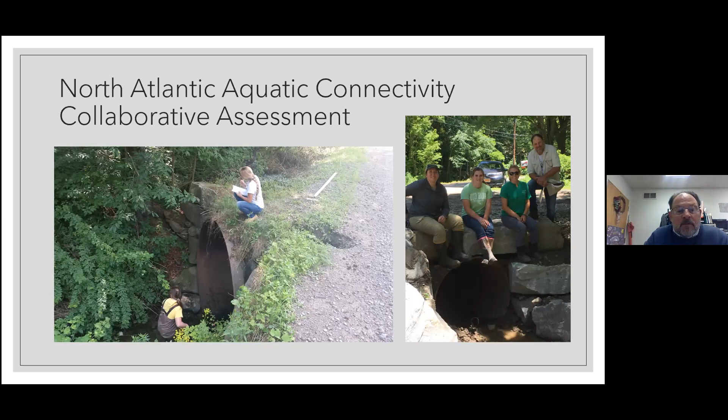So here we are doing the culvert assessments with myself, Chelsea White, Ainsley, who was a technician for me, who went to Cornell Cooperative Extension, and we had a TNC technician or a summer aide that was also assisting. So again, quite a few culverts were assessed throughout the watershed. Quite a few culverts weren't in too bad a shape either; we had more culverts that were allowing fish passage than were not. So we picked two sites for the grant that were the worst sites. This one is called Gardner Road.

Slide to the left showing the outlet of the culvert. You can see how the culvert is perched in the air, probably about a foot to almost a foot and a half, with a plunge hole at the outlet end right at the road shoulder. So this is why the fish passage was compromised on this culvert. And this culvert was only a 3-foot diameter size culvert.

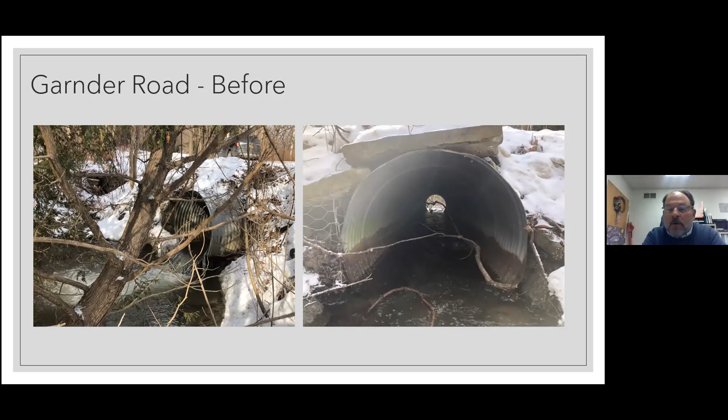And so we had to look at how to change the capacity of the culvert, along with trying to get the fish passage to work in this situation. What we decided to do was we did some measurements upstream, and these are the upper reaches of the Cohocton River and minor tributaries that flow to the Cohocton. They have been surveyed by DEC in the past, and some of them do have brook trout and brown trout in them.

So the biggest thing we had to do was get a stream permit, of course, because it's a Class C(TS) stream. And so we were trying to meet the dimensions that were needed for the new culvert requirements through the permit system of the 1.25 times the width of the bank full event, and then the embeddedness.

This project, we ended up being able to use a culvert which was an arched type culvert. A one-piece aluminized culvert was purchased because it was the most affordable and the easiest for municipalities and ourselves to install, rather than trying to do concrete box culverts and all that. This culvert pipe ended up being six foot in height and 9.5 feet wide at the bottom arch pipe.

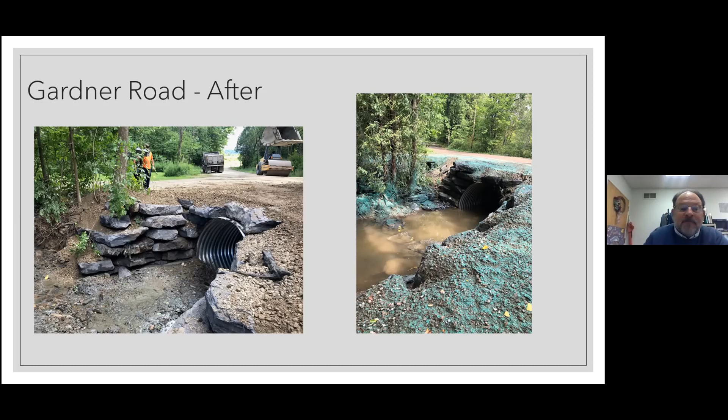This is the other project we did on Duesenbury Road. This culvert was actually a little bit bigger than the one on Gardner Road. It was a 3-foot squash pipe. Originally, we ran our calculations and bank full flow events, and we came up with the same size pipe that we did on Gardner Road. So we ended up putting in a 6 by 9.5 foot bottom width culvert in this one.

And Fisheries, or Pete Osterman, wanted us to try to maintain the pool at the outlet, because that's actually where most of the trout were holding up, especially this summer when the flows were so low. There's not a lot of pools or habitat along this small stream channel. So we ended up going in and actually netting the brook trout out of the outlet hole, and we took them upstream and put them in a temporary holding area while we did the project.

So my technician Chelsea and my operator Dave went fishing. I hope that was okay, if Pete Osterman's on, I don't get in trouble, but we put them upstream for the time we did the project, and then put them back in when we were all done.

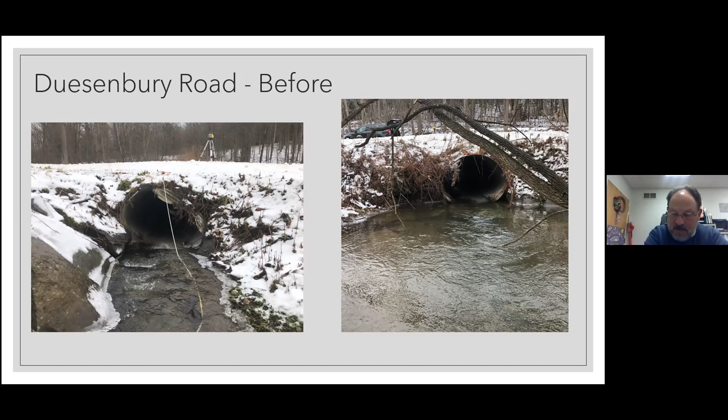Here we are tearing out the old culvert. It was a culvert that was 60 feet long. It was 3 20-foot sections. We ended up putting in a 65-foot culvert pipe to replace it. 2-piece culvert, so we had to actually band this one together.

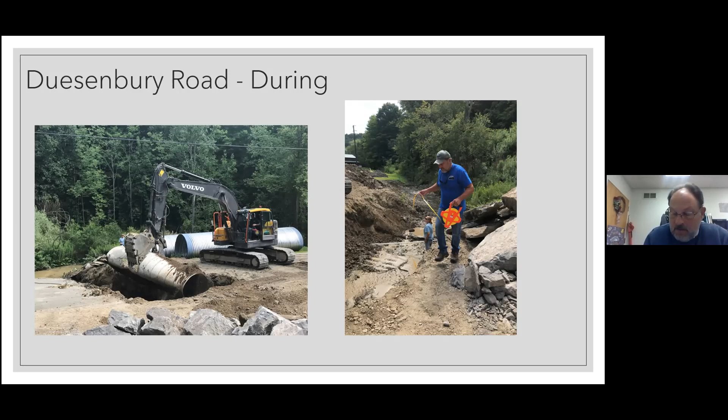Believe it or not, we were able to get that culvert dug out, installed, and backfilled so the road was open the same day. So we didn't lose any road. We didn't need to close the road for a lengthy period of time. These culverts get installed fairly quickly, and they work pretty well.

Here we are working on the inlet on the left-hand side. We're supposed to be embedding these culverts, so we tried to get a washed, cobbly gravel material, and we poured them in on the inlet end and pushed them in as far as we could.

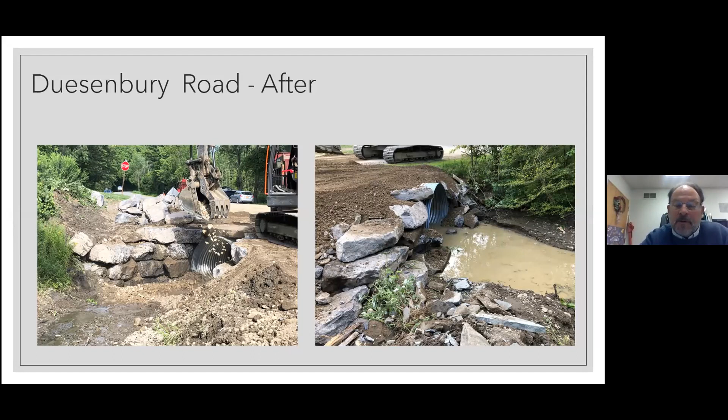And on the outlet end, the slide on the right is the outlet end before the weir or sill was built downstream to raise the water level up into the pipe. So we actually backed water up into this pipe almost to the inlet end by the time we were done with our downstream structure work. So those were the ones through that grant program.

And then I was contacted by Region 9 Fisheries in Allegany County to assist them with a fish passage project on 3 sites in Allegany County. These were all native brook trout habitat sites, and they were located in the Genesee River watershed on smaller tributaries in the upland area.

So this was what Region 9 DEC wanted to follow, the typical engineered rock riffle type construction to try to back water into existing culverts. We did not replace any culverts. These were all existing culverts, and we're basically trying to back water into them so that we had fish passage from the pool that was at the outlet of them.

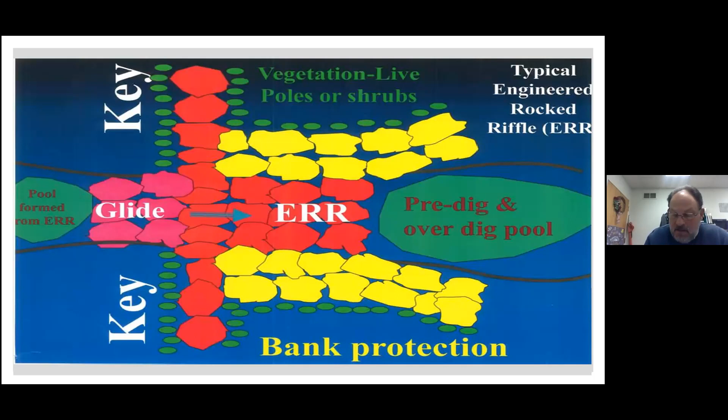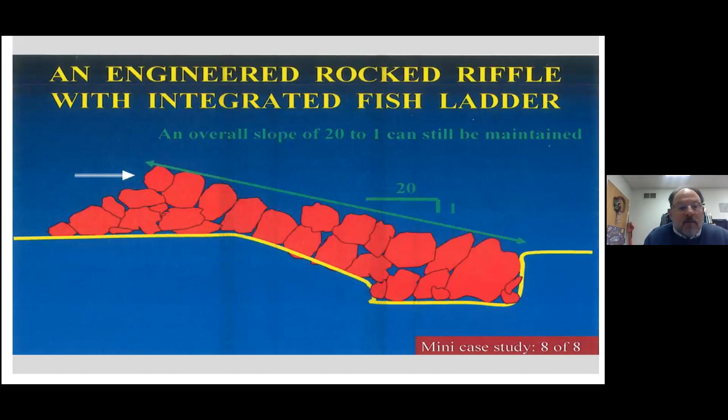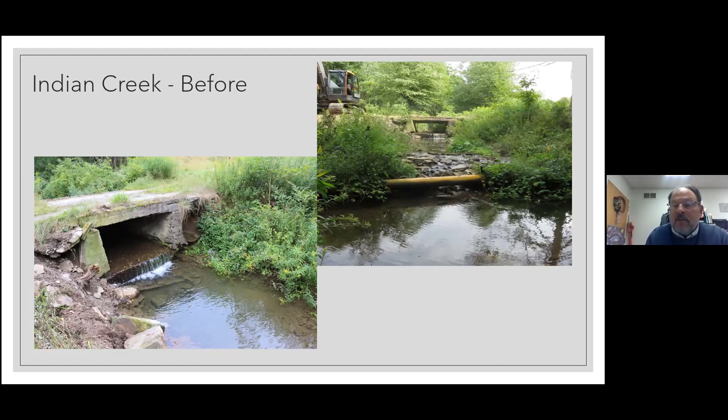Fortunately, this was the abandoned gas line. Although they had stuck a new gas line just upstream of it, 5 feet probably, which was only buried 17 inches underneath the bottom of the stream bed. So it was a little bit of a challenge trying to construct the rock riffle, because we actually had to bring the rock riffle down below this old exposed gas line so that we had a good keyway into it so we could hold all the material upstream, and so we didn't have any scour or erosion at the toe.

The reason why is we all discussed, we actually had two Fish and Wildlife people there working with us on this project. A fellow by the name of Thomas Hoffman, who works in the Great Lakes watershed with U.S. Fish and Wildlife, and a Betsy Trotter, who was actually not the administrator, but she's the one we worked with to get this grant approved. She actually had the funds, and the Soil and Water District in Steuben County actually applied for the grant money, and we're administering this grant.

But anyway, everybody agreed that because of the length of time it was going to take us to do this project, that we wouldn't go to all the work to try to dewater it and then put everything back when we were all done. And that's probably one of the reasons why we shocked the fish out of the hole before we started.

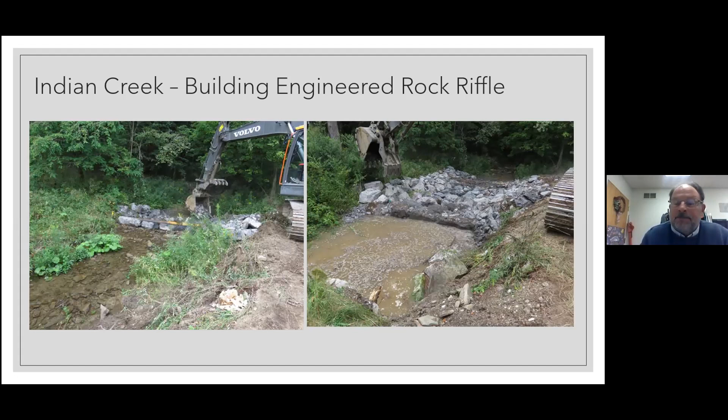And we were able to build enough pockets in between the outlet keyway and all the way up to the pool so that the fisheries and Fish and Wildlife were happy that the fish would be able to get up through all that once it filled up with the water. So there it is after the placement of the rock riffle, and the water's backed up into the box culvert almost a foot deep.

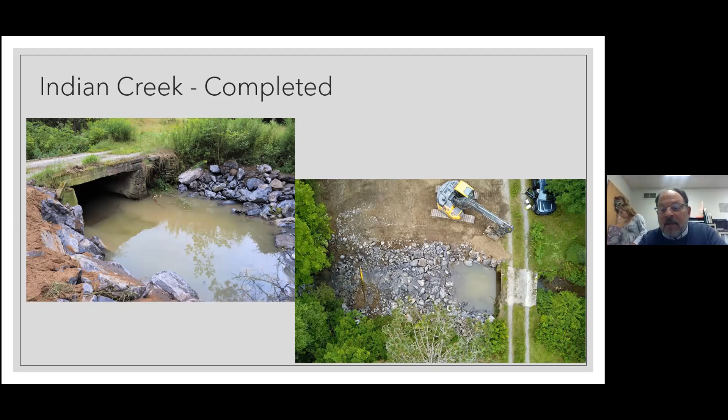The aerial view you see there is thanks to Melissa Yerrick with the Upper Susquehanna Coalition. She came the day that we installed all this and ran the drone around. So we got a drone shot of the actual project that was completed. You can see the private driveway bridge and the pool at the outlet and all those little pockets in between those big rocks filled in with water eventually, and the fish can actually make it up through those pockets to that pool and then upstream.

This is what it looked like after we had it all hydroseeded. DEC Region 9 is going to go in there in the spring and plant some willow cuttings on the top of the banks to give us some buffering and some shade. But you can see how the water plunges down through in between those rocks and makes little pools so that the fish can get themselves upstream.

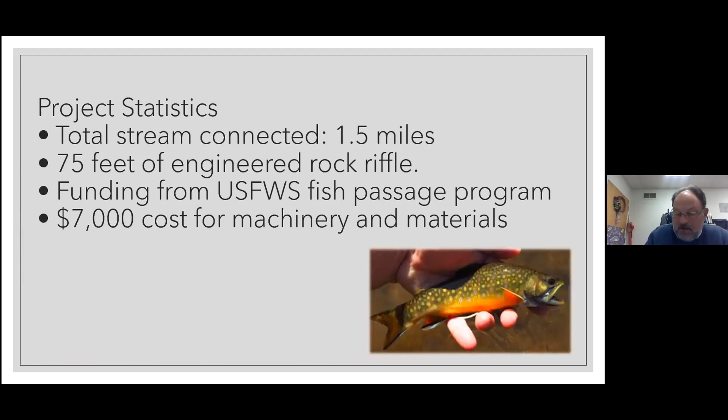So that project connected about 1.5 miles of stream upstream. We built a 75-foot engineered rock riffle, funding through the U.S. Fish and Wildlife, and it cost us about $7,000 to do that project. We had it all done in one day. So the disturbance was only for one day, and then we were on to the next one, which was over on Spring Mills Creek, which is outside of Whitesville in Allegany County, just across the Steuben County border.

So we went downstream, probably, I almost think it was 30 feet, and we built a rock riffle downstream to back water up into the pipe on this project. And this one was similar to the one I just showed you, where we ended up using rock riprap for the riffle. This one didn't end up being quite as long. This is a little shorter.

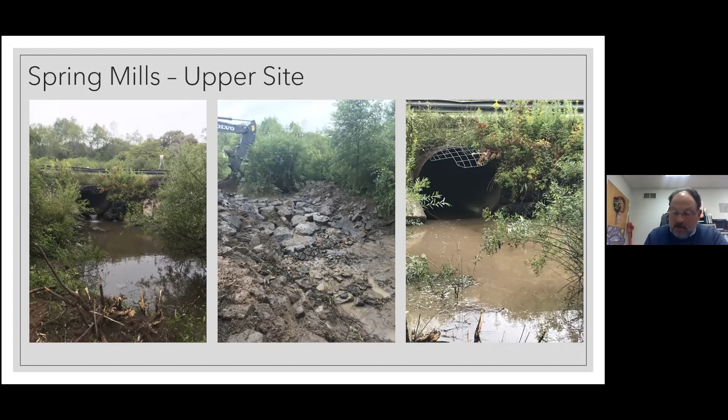And the U.S. Fish and Wildlife gentleman, Tom Hoffman, stayed on site with us on this job all day and directed us while we were installing it. So it was nice to have somebody there from their staff to assist us. The farther right slide, you can see the water starting to back up into the pipe right after we got done, and actually got a little higher than that. So a successful fish passage project.

Anyway, that holds quite a bit of fish in there, but they couldn't move from this area upstream because of, again, over a foot drop out of that smooth bore culvert pipe. So we ended up going down below the willow tree and building a rock riffle down there on this project, similar to the other two.

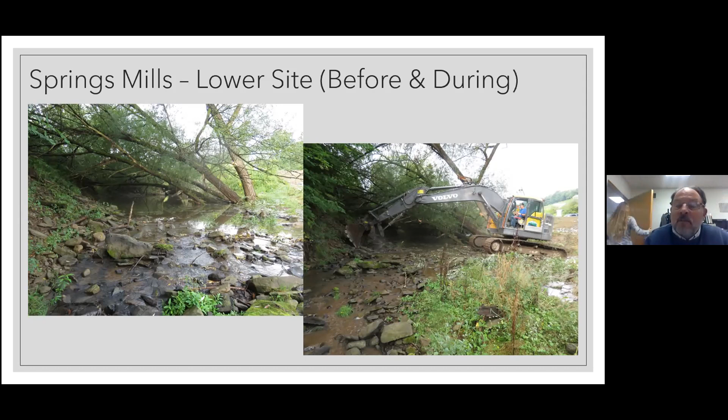So here we are placing the stones in at the proper elevation, surveying along, trying to make sure we get it high enough so we can back the water in. We left the willow tree there because the landowner needed it so that the children could jump off of the branches into the water in the future.

So this project took us more than one day, simply because we actually hauled this rock all the way from Seneca Falls, New York, because the Bath quarry no longer is making riprap. 33 years and they no longer make riprap. So we have to get it from our lowest bidder, who was Seneca Stone, and we hauled rock to this site in excess of 100 miles so we could do the project. But we got it done.

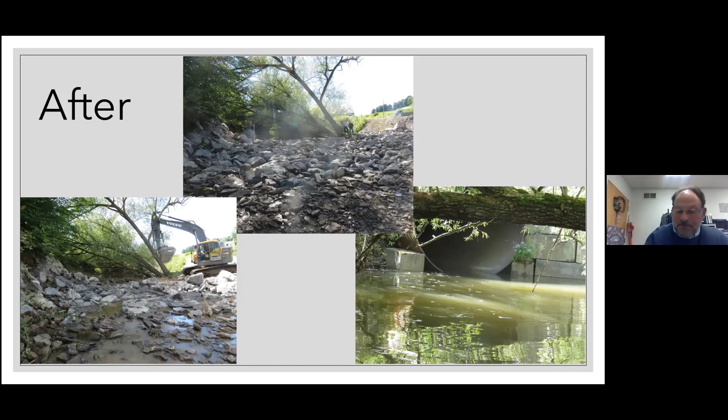And this is after we had it all hydroseeded, and it was October. So the seeding's coming in good. You can see how the rock riffle's working. You can see we have water ponded through all those rocks in that riffle, so the fish can migrate themselves up to that big pool and then up the culvert. We connected 4 miles of stream, and it was a 125-foot long engineered rock riffle. And this one cost us a little more, about $16,500. That was my last slide.